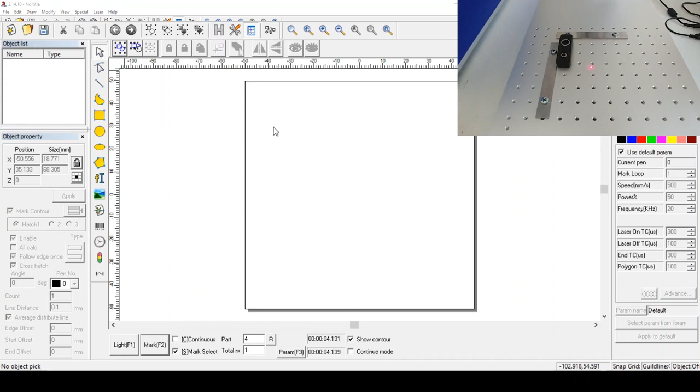So first I'll open my sketch that I imported into EzCad. For our purposes, I've already saved my imported DWG as an EzCad file, so I'm just going to click open, and I'm going to choose this tight sketch. It's got an EZD ending to it, and you'll see that pops up here.

I'm going to click this auto size button, so that zooms directly to resize, so it's in my field of view. One thing that's interesting about EzCad that's pretty similar to most CAD programs is that if you highlight something from left to right, it won't select that.

See, this tight is all one sketch, it's all one object. So if I click it, you can see it's one object. It doesn't include this text down here, the patent pending. So if I go left to right, it won't select it unless I choose the entire body of text. Now if I go right to left and I choose any part of this, it selects the entire thing. It doesn't include the patent pending, that's a separate thing.

You can see over here that one is the hatch, which just means I filled in the text, it wasn't outlined. And this is the combine, which is actually text I created in EzCad directly. That was not imported from CAD.

So if I go right to left and I choose any part of the patent pending, it chooses the entire thing. And if I have this mark select button checked, this little checkbox down here on the bottom left, that's going to say if I mark right now, then it's going to include everything that's selected on the screen. If I just have the tight selected and I choose mark select, it'll just mark the tight and not the patent pending.

So what I want to do now is see how this shows up on my part. All I'm going to do is choose the entire thing, and you don't have to choose mark select. If you unselected that, it would mark everything that's on your screen anywhere. Sometimes you'll have multiple things on the screen at once and you won't want to mark everything. That's the purpose of that.

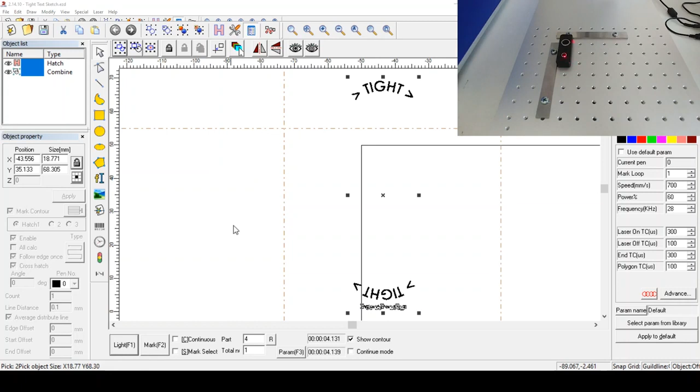I've already got it positioned correctly, but if it were positioned, let's say to the right, then it would be over there. That doesn't look quite right, so you can just move it around with the arrow keys, or you can drag it around with the mouse. I'll press stop, and I'll send it back to where it was. So we'll just light it again to make sure it's in the right spot. And that looks pretty good.

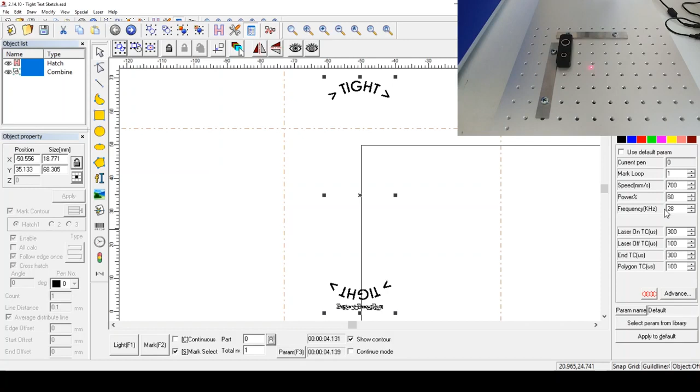So I'll press stop, and we'll do a test mark just to make sure it's okay. I'm going to choose mark select just because I like doing that. Down here it says it's going to make one part, and we've made a total of 4 parts. I'll reset the counter. Our settings over on the right side here say that we're going to use the default pen, and we have the frequency set to 28. I think the lowest you can go is 20, that would be the most powerful, and 60% power. Speed is going to be 700, that's kind of in the middle. You can go anywhere from very slow to over 1,000 millimeters per second, which is pretty fast. So I'm going to mark this part just to see how it looks.

So a couple seconds to mark it.

Looks pretty good. So now I want to say, let's mark a bunch at a time. How do we do that?

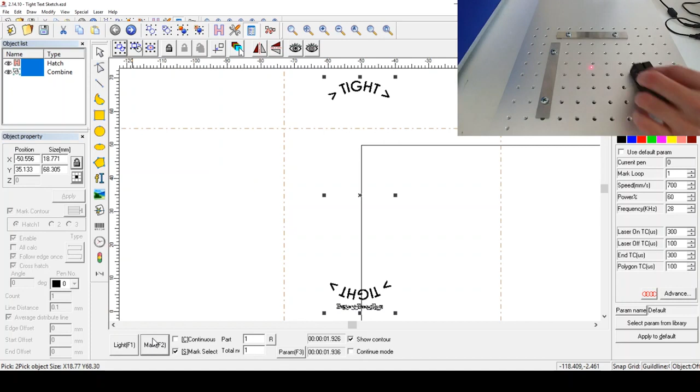So let's say I just want to mark 3 at a time. Now there is a top and a bottom to this part, so I want to make sure it's oriented correctly.

So what I'm going to do is keep the entire thing selected, and I'm going to go up to this modify button at the top. I'm going to choose array, and I'm going to choose rectangle.

These two buttons up here just control the order in which it marks your array of sketch objects. I don't really care if it goes left to right, top to bottom, whatever it wants is fine, so I'll go left to right. I want 3 of these next to each other, so my number of X objects is going to be 3. I'm just going to have one row, one column, one row, 3 columns, so I'll say 1. I don't want to repeat this in Y.

It's pretty much the exact same as patterning something in regular CAD software. For array X distance, these are 1-inch parts, so I'm going to go over 25.4 millimeters, 1 inch, and I'm not going to have any Y. But if I were, and I were doing 2, these are 3-inch parts, so it would be about 76.

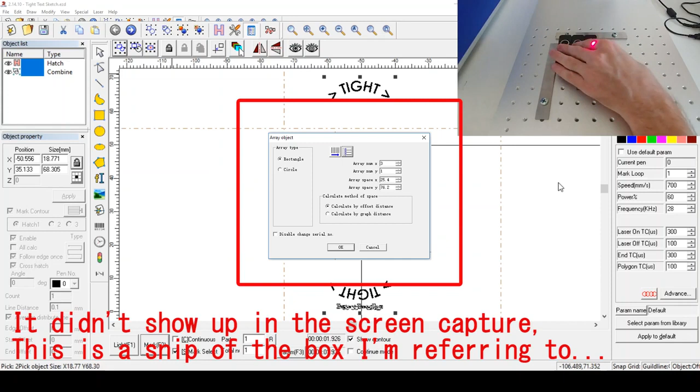So then you have the option of choosing to calculate by offset distance or by graph distance. Graph distance, they explain this in the manual, and if I can I'll show a picture of it. They show kind of from edge to edge is graph distance. So if I had them separated like this, it would be the distance between these 2 parts. For our purposes, I think it's a lot easier since I have the parallels laid out, just to say from center to center, it's 1 inch.

So that's all I'm doing there, and I press OK. It will create the duplicates, and all I'm going to do is press zoom all again to put everything in the center. I'm going to highlight all, I'm going to highlight all 3 of these, and you can see everything on the left here is selected, all of the objects.

I'm going to press light, and you can see how that shows up when it's lit. Kind of goes across every single part you have there. I'm going to press stop, and if you want to make sure that your spacing is correct, you can just select one of these. It's a little bit easier to see, and press light, and you can just see how it looks on the 3rd object.

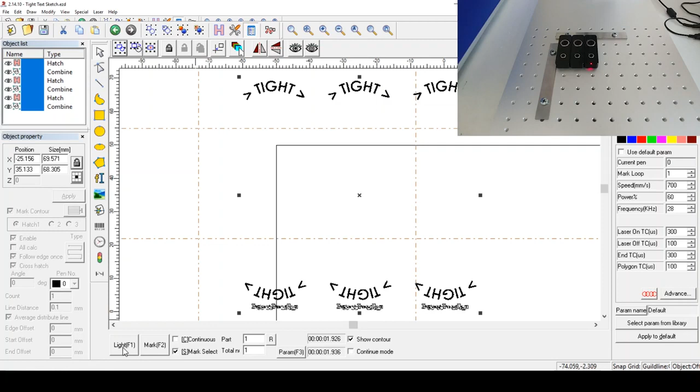And I'm pretty happy with that. So I'm going to choose all 3 objects at once, and you can test mark 1 and then replace it, whatever you're comfortable with. So I selected all 3 of these at once, have the mark select button checked, kept all my settings the same, and now I'm going to mark them.

And you can see that marked from left to right. Looks like it came out pretty good.

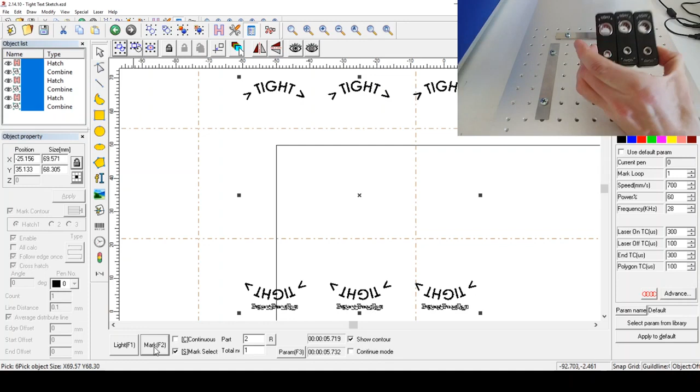I have done as many as 10 of these at once by doing 5 per row. The upside to doing that is you just click it and you can walk away for a minute or so. The downside to doing that is if you misposition a part, or if you put something in upside down, you're going to end up scrapping, you could end up scrapping 5 parts or more at once, which I have done.

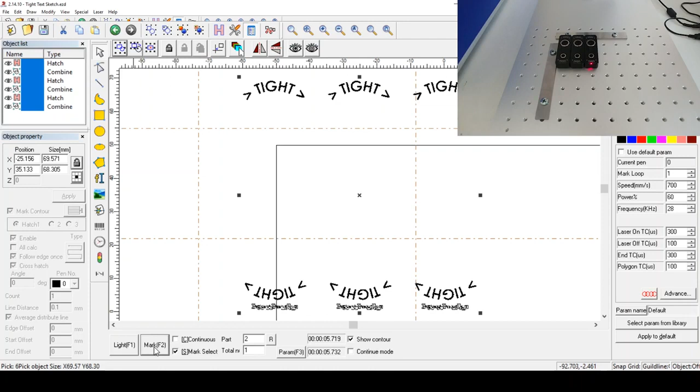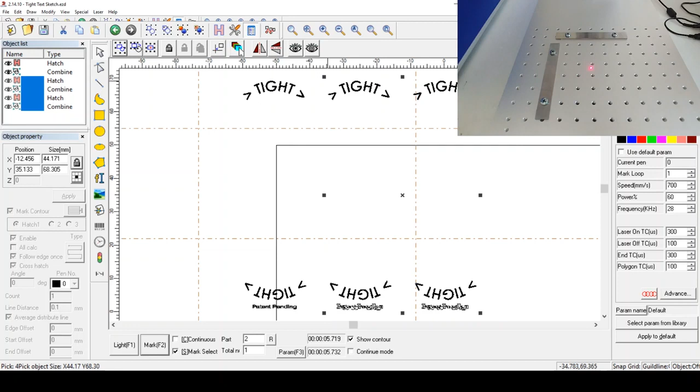So let's try to do 2 rows now. I'm going to take, well, we don't have to start from all 3, let's get rid of this first array. I'm going to highlight this again, go into modify, I'll go into array, and this time we're going to still do 3, and then let's do 2 rows. So I'm going to keep my 76.2, and we'll calculate by offset again. So I'm going to say OK.

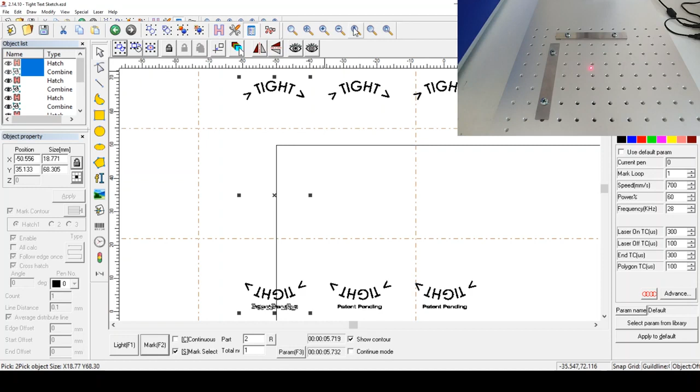Now we have 6 total parts here, and I'm going to do the exact same thing we did before, but I'm going to load 6 of these this time.

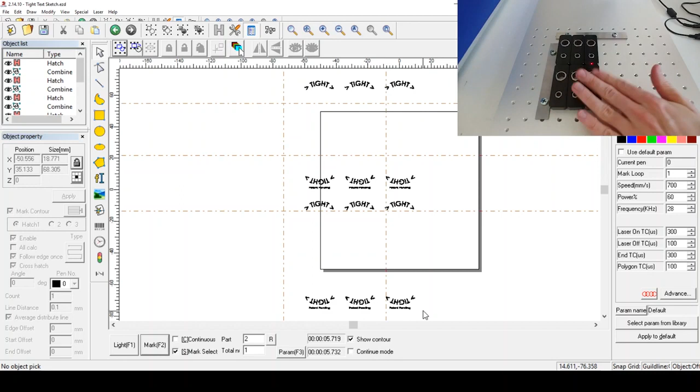Now I'm going to select the bottom right part, and I'm going to light it just to make sure I'm in the right position. That looks pretty good. And I'll select this one as well just to make sure I haven't made any errors. That looks fine.

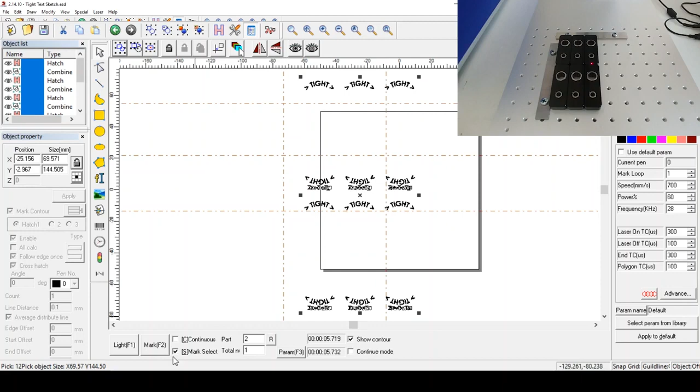So I'm going to select everything and keep my mark select box checked, and I'm going to go ahead and mark. So that looks like it worked just fine.

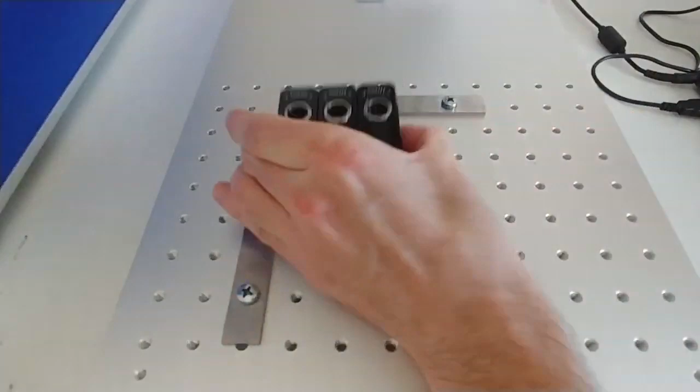So you can see it's a little bit faster if you can load 6 parts at once versus 1 part at once. Only downside is you increase your risk of scrapping things just a little bit. And it can sure be fast to scrap parts, especially since this is probably the end of the process here, after you've got all the money put into your part.

But I just wanted to show you, this is one of the things that I was wondering about when I bought the laser and when I started using EzCad. Could I do this? Was it easy to mark multiple parts at one time? And I found that, yeah, not a big deal. So hope that's helpful, if you have any questions, go ahead and leave them in the comments.